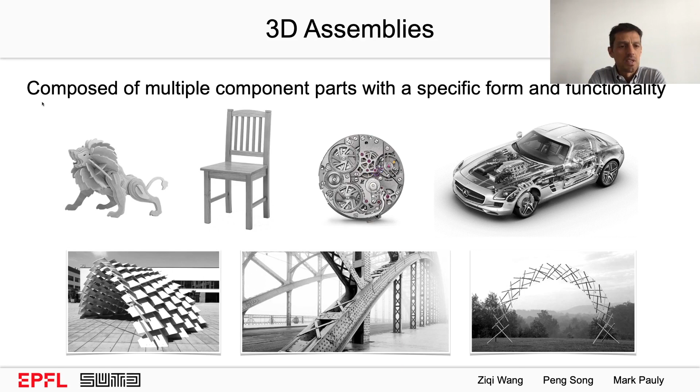So let me get started on the introduction. 3D assemblies are really ubiquitous in our life. Here you see examples of toys, furniture, a watch, a car, many structures and architecture. These assemblies are composed of multiple parts and have a very specific form and functionality.

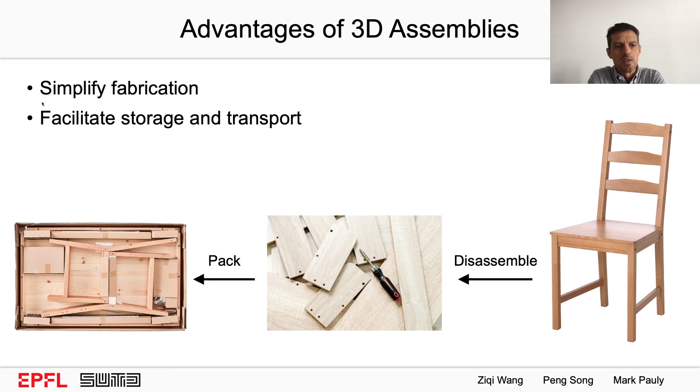First and foremost, fabrication. We can simply fabricate geometrically much simpler parts that can then be assembled into a compound object, which can have a much more complicated shape and also interesting functionalities. This allows us further to store and transport the component parts in a compact way. Finally, we can very easily maintain an assembled structure.

So in summary, the advantages of these type of 3D assemblies come from the fact that we can take simple forms and aggregate them into complex shapes. They can be disassembled and rearranged, for example, for storage and transport, and we can reassemble and reconfigure assemblies to adapt their form or functionality.

However, these advantages also come with various challenges for design. So let me quickly walk you through these design challenges.

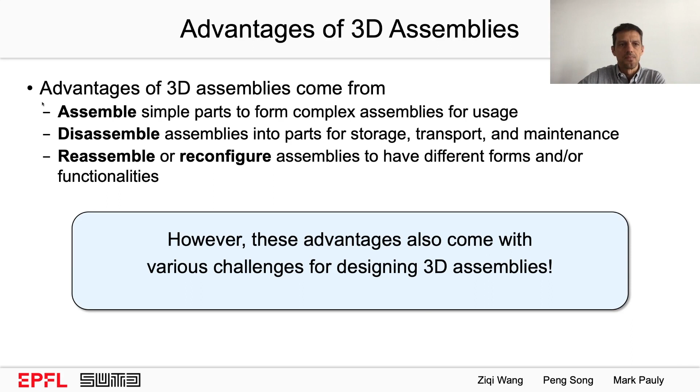First of all, we have to look at how we can adapt the component parts to a specific fabrication technology, as there will be constraints on the fabrication imposed by a specific machine. For example, if we use laser cutting, we're constrained to a specific type of 2D materials. CNC machining comes with its own constraint, and 3D printing as well.

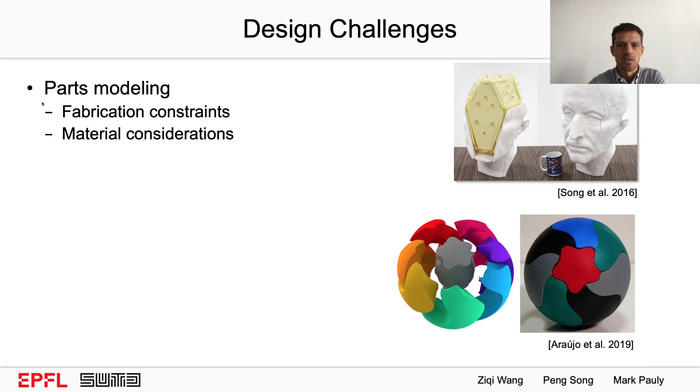Related to that, there will be constraints on material and appearance of the individual parts. We also need to figure out how we're actually going to join and aggregate component parts together. So what type of joining model are we using? How are joints interacting with the individual pieces in order to achieve the desired functionality?

We also need to look at the assembly process. In many instances, we care mostly about the final state of the assembly, but we will also have to find a way to put the pieces together such that we actually achieve the final desired assembly. If we care about storage and transport, we need to find ways to aggregate and pack the individual parts.

Very important, we want to, of course, during our design, create assemblies that are structurally stable. And we will look into this in great detail and see what that means specifically for the design process.

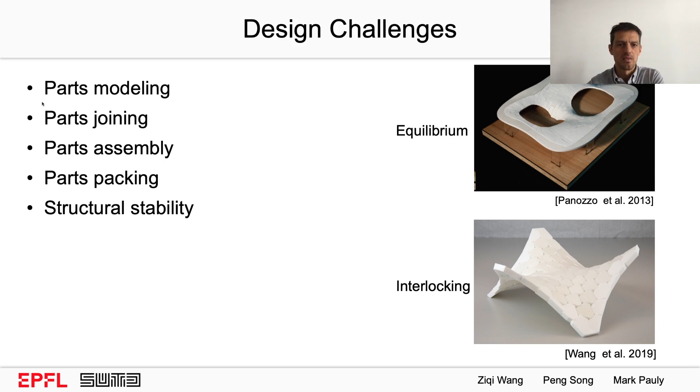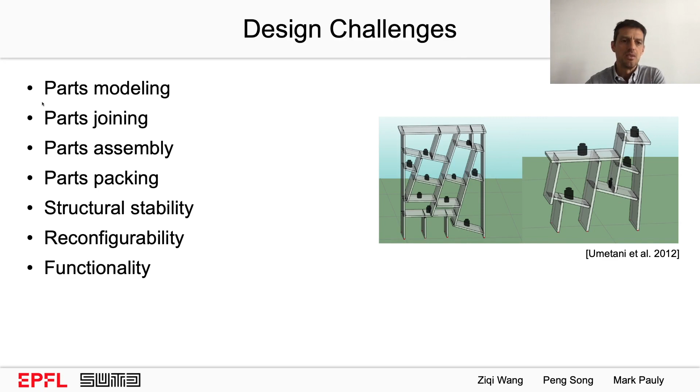In case of reconfigurability, like you see in these examples here, you add additional design challenges because the parts will not only be aggregated in a single way, but potentially in multiple ways, which then relates also closely to the function of the assembly. Finally, you might have functional requirements, for example, load-bearing capacity, that you need to take into account carefully within the design process.

So if we want to look at a global view of the computational process for designing assemblies, the general idea is to come up with an efficient and effective way to come from an initial idea about an assembly to a final physical model. And because there are many steps involved, including designing the parts, fabricating them, looking at their structural and functional performance, computation is really a key to make this process effective.

So these two aspects relate to the main part of this tutorial. In the second part after this introduction, we will look at tools to analyze computationally various assemblies. And then in part 3, Ziqi will talk about algorithms and data structures to design for assemblies.

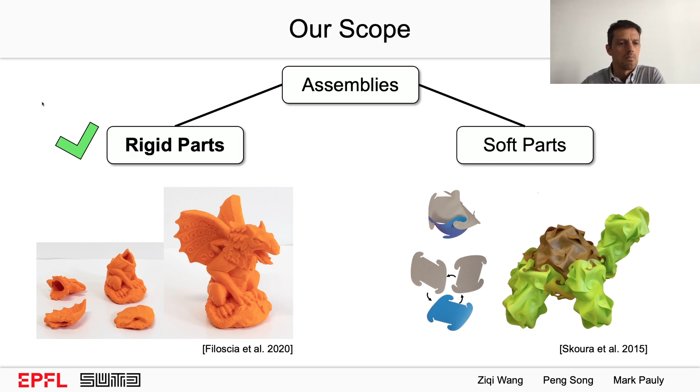To define the scope further, we will look at assemblies composed of rigid parts. We will not study assemblies where deformation of the parts plays an essential role in how they're connected, as you see here on the right. Our focus is on component parts that can be abstracted as rigid bodies, allowing us to focus on geometric methods and efficient optimization problems that abstract away many physical properties of soft parts.

Typical applications, as I mentioned earlier, include furniture pieces, architecture, puzzles, and so on. This distinction also has implications on the typical shape and function of parts, and changes the focus of design as well.

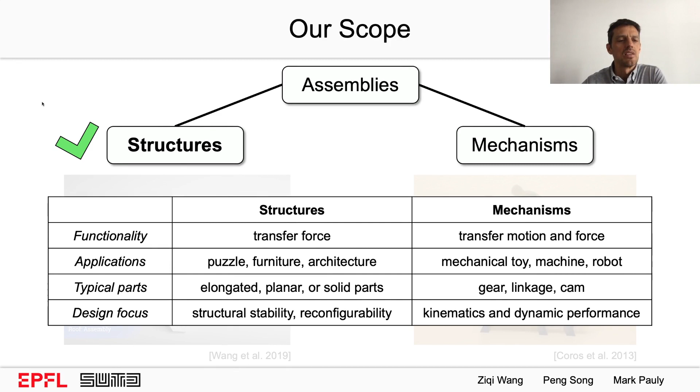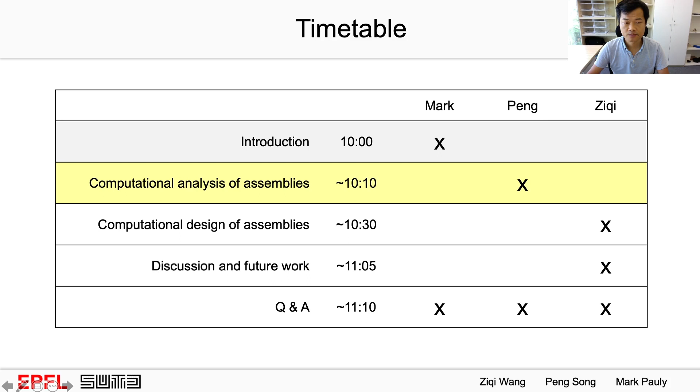And with this, I want to hand over to Peng, who will now look at computational methods for the analysis of assembly. This is Peng from SUTD. I'm going to present the second part, computational analysis of assemblies. This part will take around 20 minutes.

In this part, we introduce computational methods to analyze 4 different aspects of assemblies: parts joining, how to join parts together; assembly planning, how to assemble a set of parts into the final assembly; structural stability, what is the performance of the assembly under external forces; and packing efficiency, how to pack the parts as tight as possible.

Let's start with parts joining. It is common knowledge that parts in an assembly need to be joined together to make the parts stable. Compare these two house assemblies. The Lego house on the right is more stable than the wooden house on the left under external forces. But why?

It is because they use different parts joining methods. In the wooden house, parts are simply connected by planar contacts, while parts in the Lego house are connected by frictional joints. We call this geometry or material used to connect parts joints.

Joints can be broadly classified as permanent and non-permanent. Typical permanent joints include adhesive material such as glue and permanent mechanical fasteners such as riveting. Typical non-permanent joints include screws and woodworking joints. Compared with permanent joints, a significant advantage of non-permanent joints is to encourage parts disassembly and reassembly.

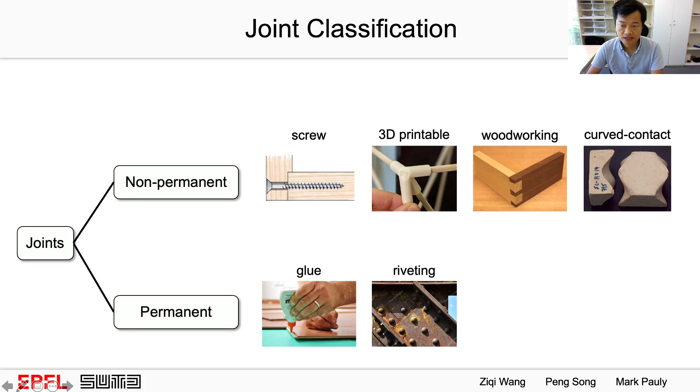Non-permanent joints can be further classified as external and integral. Screws and 3D printable connectors are external joints, and they are independent from the parts. Woodworking joints and curved contact joints are integral joints. Integral joints can significantly simplify the assembly process by assisting parts alignment and reducing the total number of assembly steps.

External joints can be further classified as conventional joints such as screws and customized joints such as 3D printable connectors. Integral joints can be further classified as woodworking, curved contact, and planar contact joints.

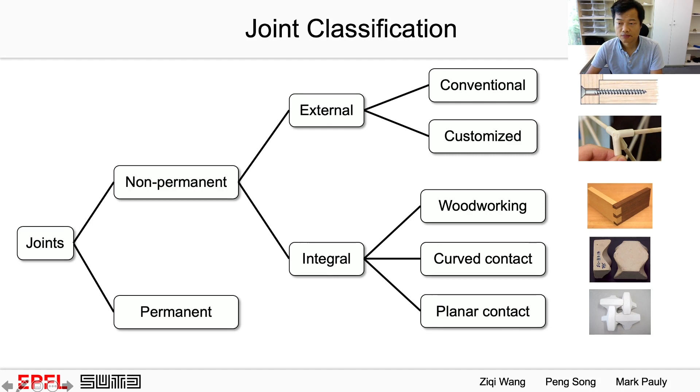Given joint geometry, we can also analyze its ability to connect two parts. Taking these four joints as an example, we can see that the joint's ability to connect parts becomes stronger from left to right. So how can we quantify the joint's ability to connect parts?

Given a joint, its ability to connect parts can be quantified by its ability to restrict a part's relative motion. In these four joints, if we consider only translational motion to take out the green part, all possible translational directions for each joint are visualized here.

For the planar contact, the green part can translate along any direction in a half circle, while for the tenon joint, the green part can only move upward. So based on this motion space, we can quantify the joint's ability to connect parts.

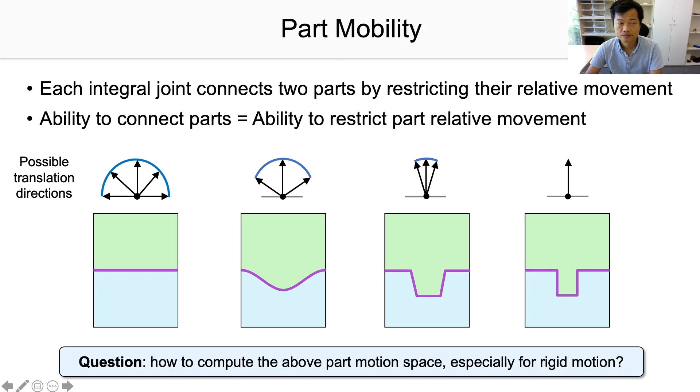Now the question is, how can we compute this motion space, especially when we consider rigid motion? To answer this, let's start with the simplest case, which is the planar contact. We assume the cyan part is fixed and calculate the rigid motion space of the green one.

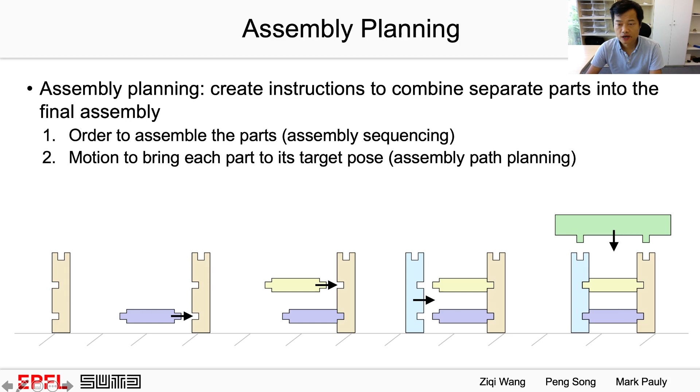Second, motion to bring each part to its target pose, also called assembly path planning. In this example, for the blue, yellow, and cyan parts, we simply translate them from left to right. And for the green part, we translate it downward.

This disassembly planning is a reverse process of assembly planning. A bijection exists between assembly and disassembly sequences and paths if we consider only geometric constraints. This enables an important strategy for assembly planning, called assembly by disassembly.

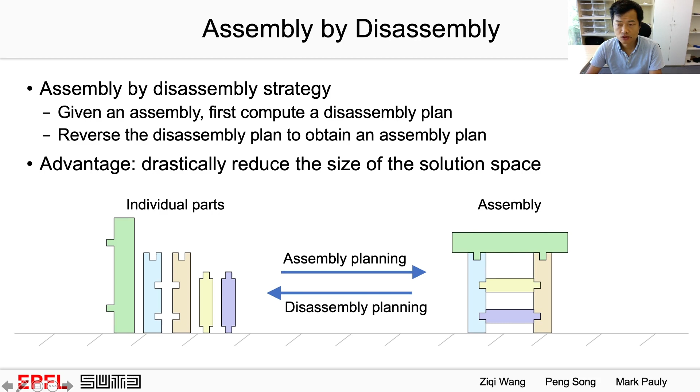The advantage of this strategy is to dramatically reduce the size of the solution space for searching valid assembly plans. This is because parts in an assembled state have far more precedence and motion constraints than the disassembled state.

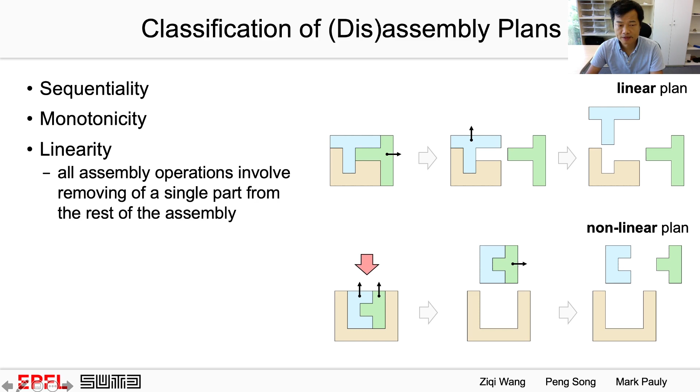Disassembly planning is an NP-complete problem. To simplify the problem, people focus on the simplest disassembly plans, which are sequential, monotone, and coherent.

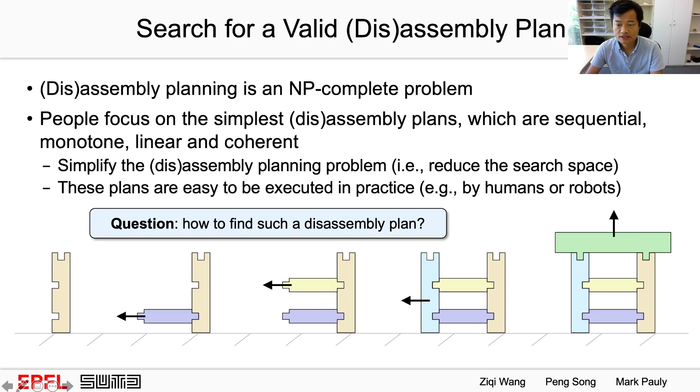Another reason to choose these disassembly plans is that they are easy to execute in practice, either by humans or robots. Now the question is, how can we find such a disassembly plan?

One common approach is based on the parts graph. We first compute mobility for parts in the assembly using the method introduced earlier, and to identify movable parts quickly, we usually select parts with fewer labels in the parts graph.

In this example, we identify and choose the green part. Next, we remove the green part from the assembly and update the parts graph accordingly. Then we repeat steps 1 and 2 for the remaining assembly.

For example, we identify and remove the cyan part, the yellow part, the blue part, until there is only one part left in the assembly.

One limitation of this parts graph-based method is that it supports only linear disassembly plans. Look at the computed disassembly plan here. In this plan, we take out each single part at a time.

Due to this limitation, this method cannot search a valid plan for this assembly, since there is no single part removable from the assembly. However, there is indeed a nonlinear disassembly plan.

In this plan, we translate the green and cyan parts together along the same direction to take them out. After that, the yellow part can be easily taken out.

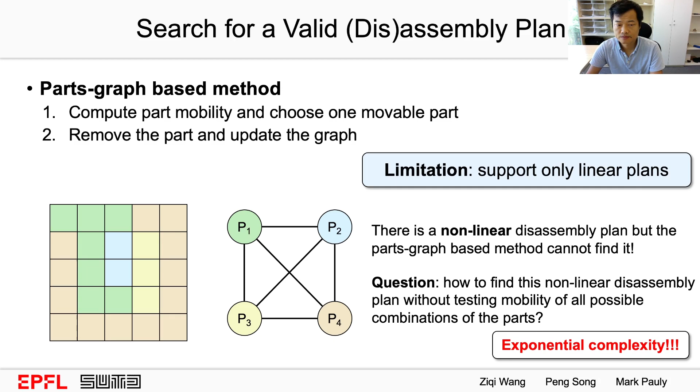One solution is to use the directional blocking graphs developed by Wilson in 1992. Given an assembly A and a blocking direction D, which is positive x here, nodes in the directional blocking graph represent parts in the assembly. And we create a directed edge from Pi to Pj if and only if Pj prevents any translational motion of Pi along D.

For example, here we create a directed edge from P1 to P2, since P2 prevents the motion of P1 along positive x.

We can prove that if the graph is strongly connected, no part or part group is movable along D. Thus, the graph on the left is strongly connected, hence there is no part or part group movable along positive x. A sub-assembly S of A is locally free to translate in direction D or minus D if and only if it is a strongly connected component.

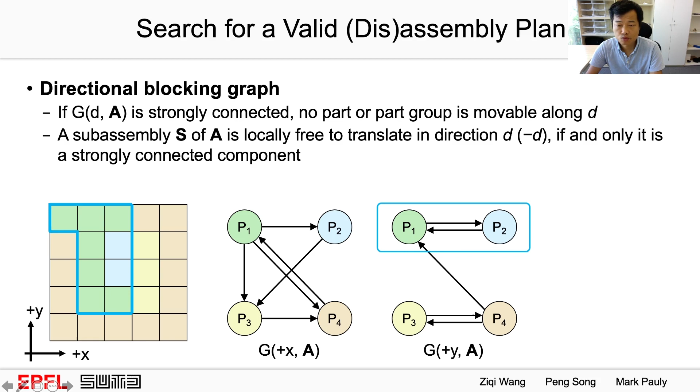Look at this sub-assembly. It is a strongly connected component and it can translate along positive y. Note that finding strongly connected components can be done in big O of n squared, where n is the number of parts.

Based on directional blocking graphs, we can find a nonlinear disassembly plan efficiently. First, we find one strongly connected component in the DBGs, for example P1, P2 in this graph. Next, we remove the sub-assembly and update the DBGs.

Then we repeat the first step and choose P3 in this graph, and remove the part P3 and update the DBGs. Since there is only one part left in the assembly, we are done with this disassembly plan search. By this, we find a nonlinear disassembly plan as shown here.

Now we will talk about structural stability. An assembly with rigid parts is structurally stable if it can preserve its form under external forces without collapse. Given these two assemblies, we know that the Lego house with friction joints should be more stable. But how can we quantify stability computationally?

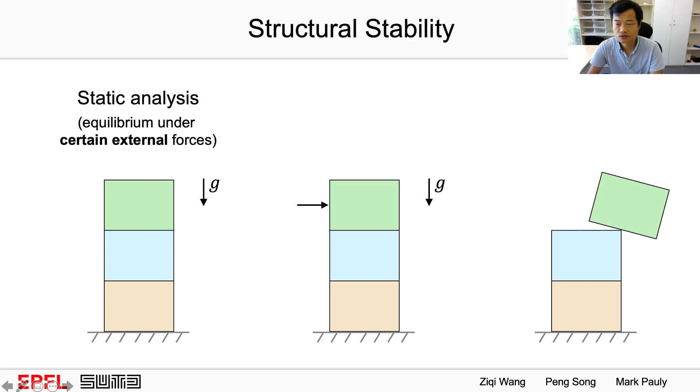A structurally stable assembly means it can be in equilibrium under certain external forces. Taking this assembly as an example, it is in equilibrium under gravity. However, a lateral force such as those from the wind can easily make it collapse.

In practice, an assembly should be in equilibrium not only under gravity but also under lateral forces. Tilt analysis is a process to quantify this lateral stability.

In an extreme state, an assembly can be in equilibrium under arbitrary external forces. We call this structural stability state interlocking.

Comparing these three states, we can see that the assembly becomes more and more structurally stable. But the cost is that the part geometry becomes more and more complex, since more restrictive joints are needed to connect the parts.

The state-of-the-art static analysis method is the rigid block equilibrium method. Given the geometry of a 3D assembly, a static equilibrium state means that there exists a network of interaction forces between the parts that can balance the external forces acting on each part.

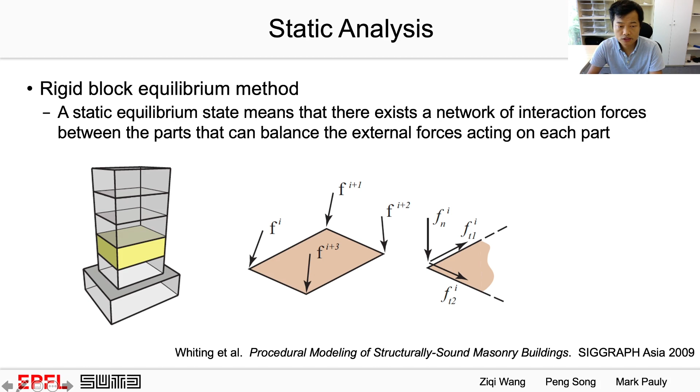Hence, the internal force on each contact plane is discretized as forces on the plane corners. Combined equilibrium constraints for each part give a linear system of equations as shown here. Besides this, we also need to formulate the compression and friction constraints. Please refer to the paper for details.

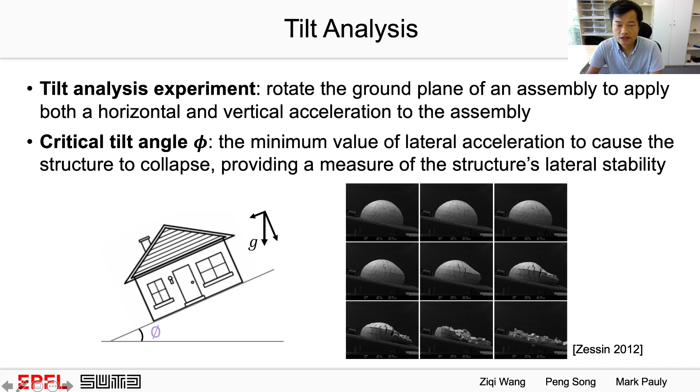Tilt analysis is the method to measure stability of masonry structures under lateral acceleration. In real experiments, the ground plane of a structure is rotated around a fixed axis to apply both horizontal and vertical acceleration to the structure based on gravity. The critical tilt angle phi is used as a measure of the structure's lateral stability.

Wang generalized this measure by considering all possible rotation axes to tilt the ground plane. This stability measure is defined as the minimum critical tilt angle among all possible tilt directions.

Interlocking test: we know that an assembly is interlocking if it is in equilibrium under arbitrary external forces. Here we define interlocking based on statics. However, trying all possible external forces is infeasible in practice. Based on the static-kinematic duality, we can define interlocking based on kinematics.

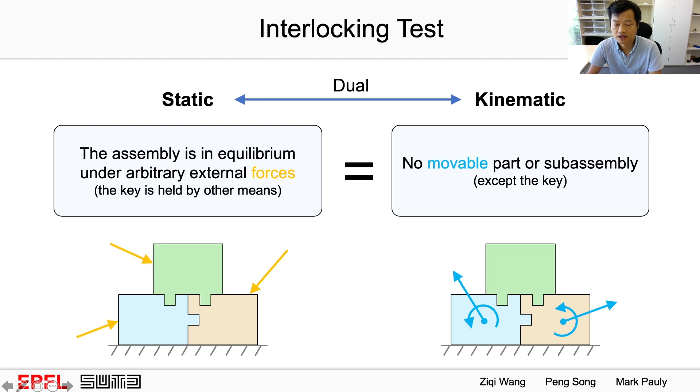An assembly is interlocking if there is no movable part or subassembly except the key. Recall that directional blocking graphs can be used to identify movable subassemblies efficiently. Hence, we can make a connection between interlocking assemblies and the directional blocking graphs. Based on this connection, we can test interlocking much more efficiently.

We show that if all these directed graphs are strongly connected except the key, the corresponding 3D assembly is global interlocking. Thus, we can test interlocking in the graph domain rather than in the geometry domain, with polynomial time complexity.

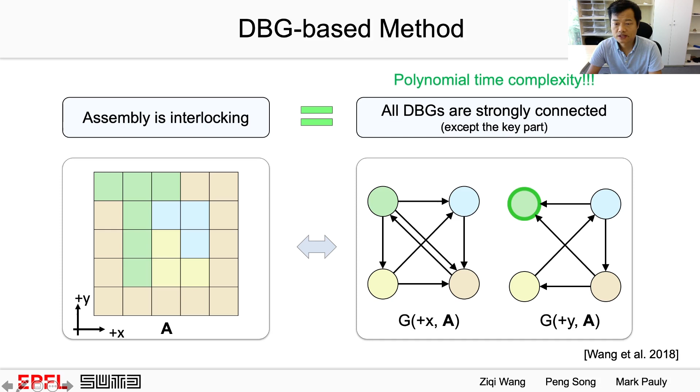The limitation of the DBG-based method is that DBGs do not consider non-sequential disassembly plans. Taking this as an example, this method considers it as interlocking. However, the green and cyan parts actually can be taken out by moving along different directions simultaneously.

To solve this issue, Wang proposed a more general method to test global interlocking based on solving a system of linear inequalities. Consider an assembly as a rigid body system where each part can move in 3D space. The constraint is to avoid collision among the parts. By stacking the non-penetration constraints for each contact in the assembly, we obtain a system of linear inequalities.

The assembly is global interlocking if the system does not have any non-zero solution. According to this method, this assembly is not interlocking since the system has a non-zero solution.

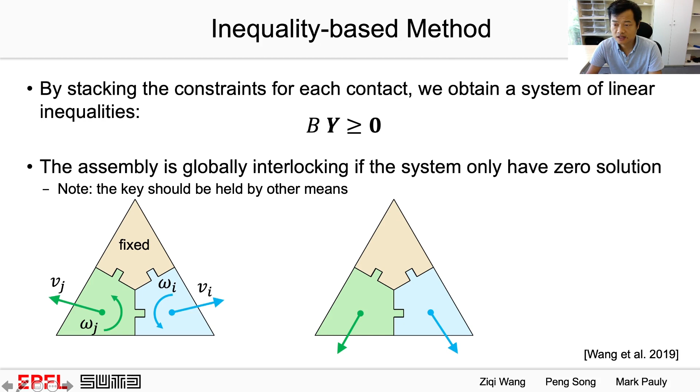Now let's talk about the last aspect of assemblies: packing efficiency. The goal of packing is to place as many objects as possible in a given container without overlapping. Extensive efforts have been devoted to packing irregular objects in 2D and 3D containers. The packing problem is known to be NP-hard.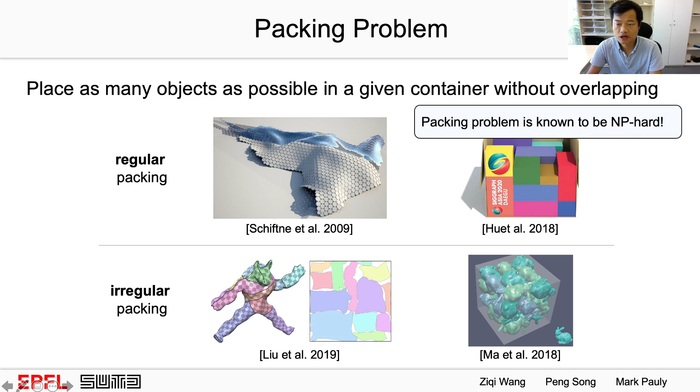The goal of assembly packing is to pack component parts of a given assembly within a container. Since parts usually have irregular shapes, assembly packing falls into the irregular packing problems. Assembly packing is useful not just in saving storage and transportation space, but also in improving manufacturing efficiency and minimizing waste of fabrication material.

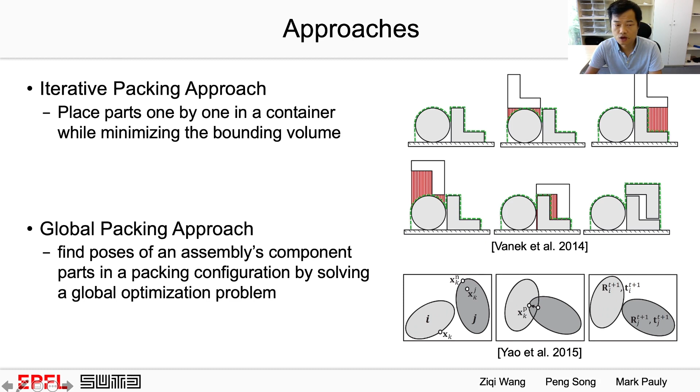There are two classes of approaches to solve the assembly packing problem: the iterative approach, which places the given set of parts one by one in the container while minimizing the bounding volume, and the global packing approach, which seeks to find assembly component parts in a packing configuration by solving a global optimization problem. Please refer to the papers for details.

Summary and discussion. In this part, we have introduced computational methods to analyze four aspects of assemblies, including part joining, assembly planning, structure stability, and packing efficiency. Future research efforts can be devoted to studying more aspects of assemblies for computational analysis, such as tolerance analysis and functionality analysis.

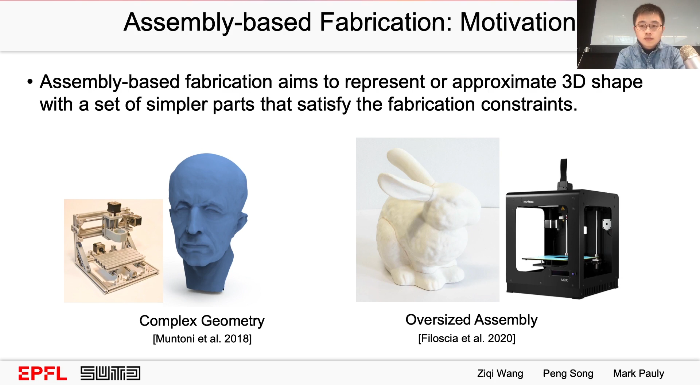My first research topic is about assembly-based fabrication. The major reason for making assemblies instead of a single piece is that every fabrication technique has its own restriction in terms of the fabricable shape. If the input shape is too complex or too large to be made, assembly-based fabrication can address these problems by approximating the input 3D shape with a set of simpler parts that satisfy the fabrication constraints.

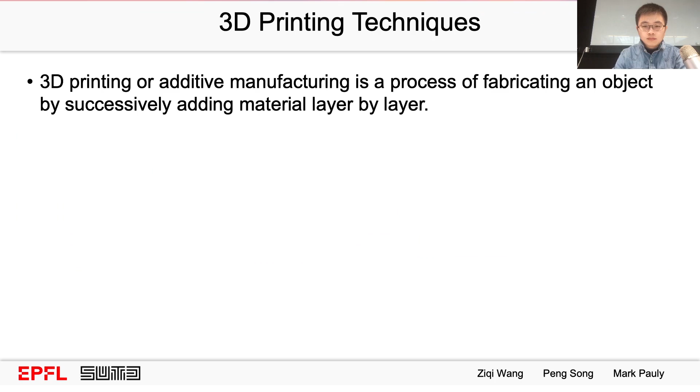Material deposition and layer solidification are two ways to implement 3D printing. Most domestic printers use material deposition due to its simple machinery. However, this machine requires printing support material for all overhanging areas. The layer solidification machine does not need support material, but at the cost of a higher price.

Most research works in graphics still focus on the material deposition machine due to its high accessibility. For assembly-based 3D printing, our goal is to design an assembly which has less support material, higher packing efficiency, and less appearance damage compared with printing in one piece. The core methodology is shape decomposition, which splits the input shape into printable parts with simple shapes and then assembles the parts to obtain the target assembly.

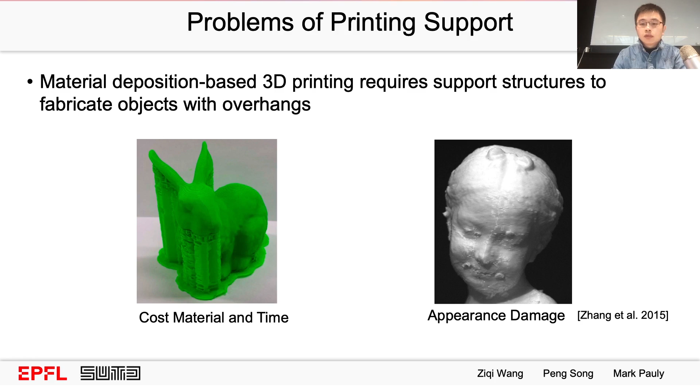Let's first see how to reduce support material by using shape decomposition. Support material, though it can be printed at a low filling rate, still slows down the printing process, causes excessive printing material, and damages the smoothness of the printed surface.

When the surface inclination angle alpha is smaller than a critical inclination angle alpha c, 3D printing material can be accumulated without extra support structures because of the strong adhesion between successive layers. In the extreme, when the inclination angle is 0 or below, we call the shape pyramidal, which is support-free for any 3D printer. Therefore, our goal is to decompose the input shape into support-free parts to save support material.

The top-down and bottom-up are two classes of approaches for the support-free decomposition problem. Top-down approaches try to find a set of 3D planes that clip the input shape into a set of parts, aiming to minimize the total support material. These 3D planes are organized as a binary space partitioning tree, or BSP tree, see left.

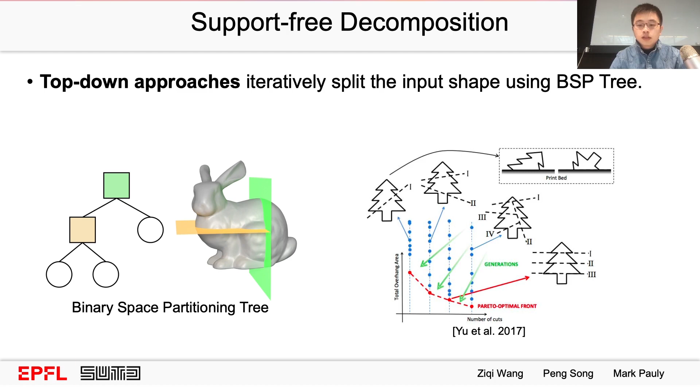Yu and colleagues proposed an evolutionary approach to search for these clipping planes, and their algorithm can save most of the support material, see right.

The second objective is about packing. Decomposing an oversized input design and packing its parts into a compact form saves storage space and reduces printing time and material cost. Sequential approaches and decompose-and-pack approaches are two ways to solve the shape decomposition for packing problem.

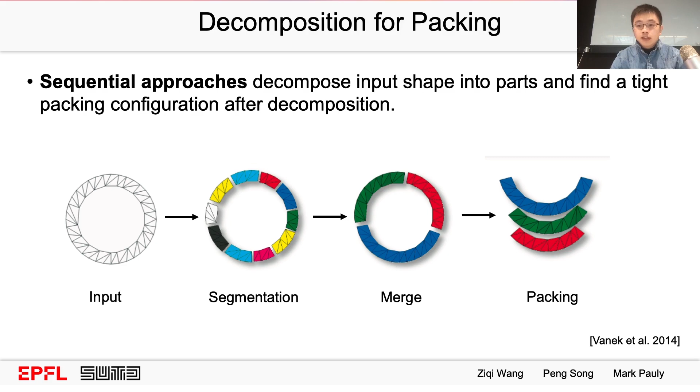Sequential approaches try to do shape decomposition followed by parts packing, while heuristics could be applied at the decomposition stage to encourage generating parts that are easy to pack. The decompose-and-pack approaches optimize shape decomposition and packing simultaneously.

Yao and colleagues take a set of pre-segmented parts as input. The framework represents each part as a level set function and optimizes the partitioning and packing to improve packing efficiency, as well as other metrics such as aesthetics.

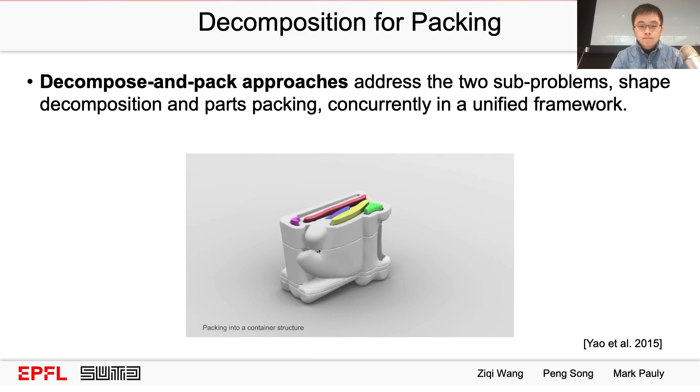The third objective is about appearance. The assembly's appearance is usually affected by at least 4 factors: cutting seams, removal of supports, staircase effect, and material color assignment. The support issue was already discussed in the previous slides, so I'll focus on the remaining 3 factors.

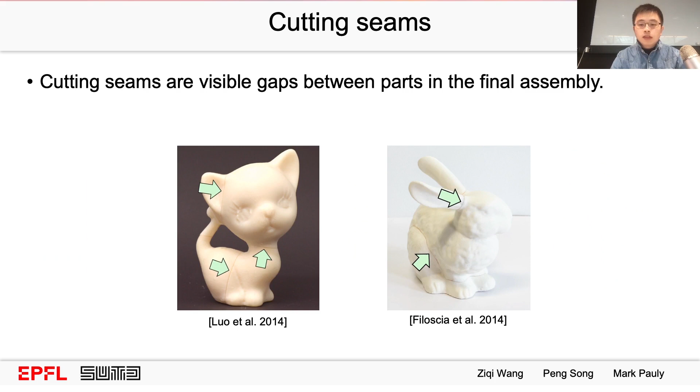The first appearance problem is cutting seams. Cutting seams are visible gaps between parts in the final assembly, which cannot be completely avoided due to manufacturing tolerances. To measure the severity of cutting seams, one approach is based on ambient occlusion, see left: the cutting seams should avoid high obtrusive areas. Another approach is to make cutting seams aligned with surface details by using non-planar cuts, see right.

Here ends the 3D printing section, and we move to the problem in CNC milling.

CNC milling is the process which subtracts material from a starting block. The machine is less constrained by the material and enjoys higher manufacturing precision compared with 3D printing. According to how many degrees of freedom the milling bit has, we have 3-axis, 5-axis, or even 5+ axis machines.

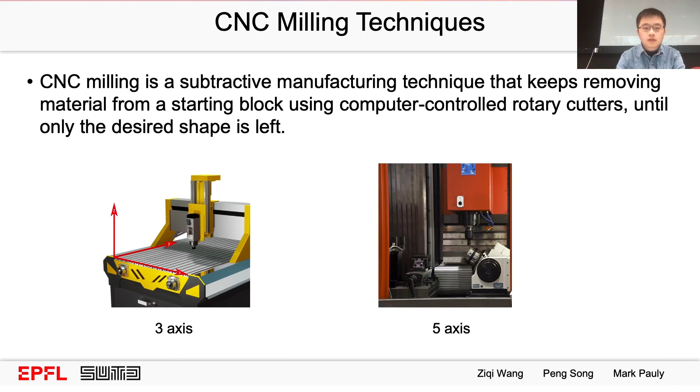3-axis CNC machine is the most affordable and user-friendly choice for home users. The problem for 3-axis CNC machine is that it only fabricates height-field surfaces. The surface height-field direction D has to match with the Z-axis of the CNC machine.

The main methodology for assembly-based CNC milling is height-field decomposition, which decomposes the input shape into height-field blocks. Local modification is needed for the parts whose outer surface has non-height-field areas.

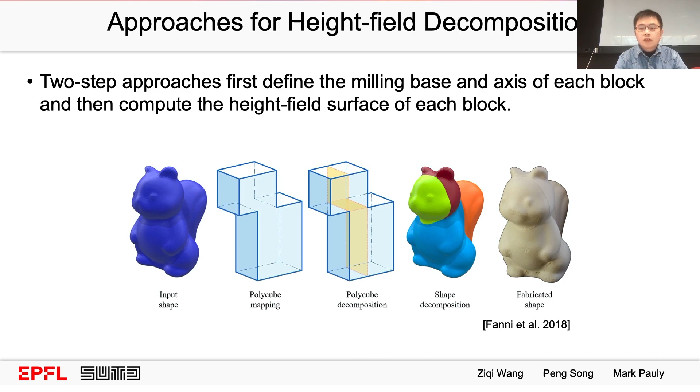There are two approaches for height-field shape decomposition: the two-step approaches and optimization approaches. Fanni and their colleagues apply the two-step approach to first compute the base and axis of each height-field block by using a polycube representation of the input shape, and then generate the geometry of blocks by performing a polycube decomposition on the shape. Muntoni and their colleagues apply optimization approaches.

Given an input model, they first produce a compact set of large, possibly overlapping height-field blocks that jointly cover the model surface by solving an optimization. Next, a minimum set cover algorithm is used to reduce the number of decomposed blocks while allowing overlaps among them. Lastly, the overlaps are resolved by assigning the overlap portion to one of the associated blocks using a graph-based algorithm.

Here ends the CNC milling. Let's move to the third part, the 2D laser cutting problems.

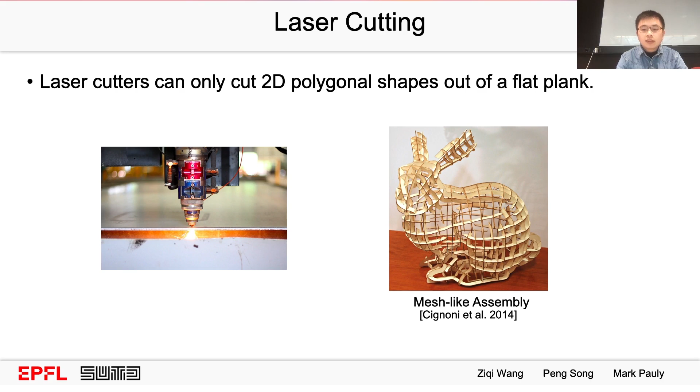Laser cutters can only cut 2D polygons. Despite this limitation, laser cutting has many advantages, such as high precision, high speed, and supporting a wide range of materials, making it widely used in industrial production and research prototyping.

To fabricate a 3D shape, assembly-based laser cutting aims to abstract or approximate the 3D shape with a set of 2D planar parts made by laser cutting. The problems can be classified into three classes: spatial assembly, mesh-like assembly, and shell assembly.

Joining 2D laser cut parts to form a steady assembly is a challenging task due to the limited contact area among the planar parts. The most effective way is to create integral joints on the laser cut parts, which not only stabilize the whole assembly but also simplify the assembly process.

Let's review the papers for the spatial assembly. Besides the shape abstractions, making furniture-like assemblies by using laser cut plates also gained much popularity among recent assembly works.

Then let's review the mesh-like assembly. Mesh-like assemblies are designed to abstract a free-form 3D surface with a set of ribbon-shaped slices.

Cignoni and their colleagues use long curved slices with prefabricated half joints, while Richter and their colleagues use short straight slices jointed with additional connectors.

We take the left paper as an example. Cignoni and their colleagues approximate a 3D surface with a set of curved slices that are placed driven by a smooth cross field defined on the surface. Half joints with enlarged sleeves are constructed on the slices to enable non-orthogonal connections among the slices in a structurally sound way.

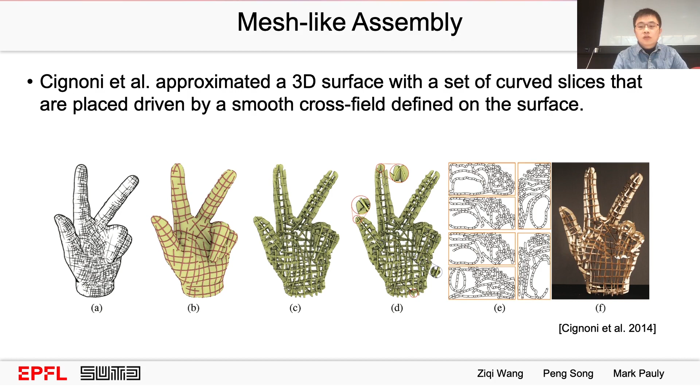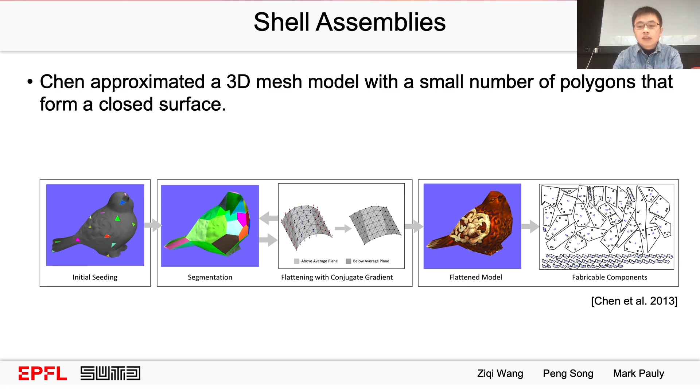Chen and their colleagues approximate a 3D mesh model with a small number of polygons that form a closed surface, by iteratively clustering mesh faces, estimating planes for each cluster, and slowly deforming the face towards each plane. Once the polygons are obtained, they are segmented to form planar parts.

Here comes the last part of our assembly-based fabrication, the mixed fabrication. A straightforward idea to avoid each machine's limitation is to decompose the input shape into several sets of parts and let different machines fabricate each set, utilizing their benefits.

Most of the recent works take a fast but shape-limited machine like laser cutting or prefabricated building blocks and combine it with a slow but less constrained machine like 3D printing to fabricate complex assemblies.

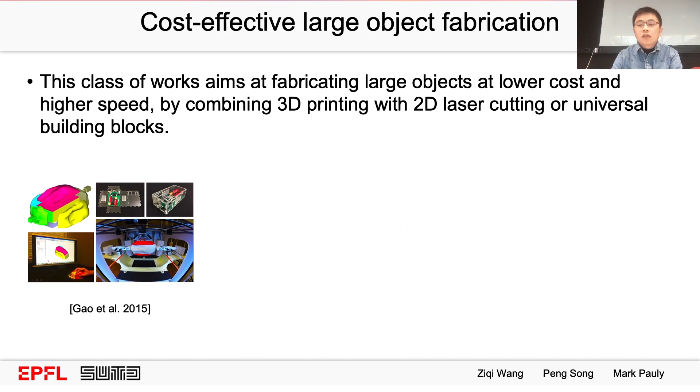The first application of mixed fabrication is to make large functional objects cost-effectively. These three projects try to fill the internal space of a 3D printed model with elements that are easy to make. In the left paper, Gao and their colleagues used laser-cut cuboids to make a customized mouse.

Another application for mixed fabrication is to make rod-joint structures. Tonelli and their colleagues designed a grid shell architectural structure by optimizing a polygonal tessellation on a given 3D surface to maximize static and aesthetic performance.

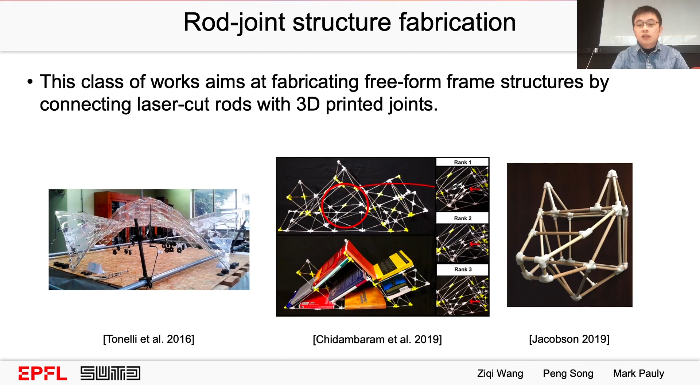Chidambaram and Jacobson both developed computational tools to design structurally sound rod-joint assemblies. The rationale is to delegate complex geometry to the joints fabricated by 3D printing, while the internal strength is retained by the rods that require only laser cuts.

There are more fabrication techniques that have not been discussed by our survey papers, like molding, hot wire cutting, wire bending, and customized fabrication tools. We also see huge potential to develop interesting assembly methods based on these new fabrication techniques.

Very few of the works in assembly-based fabrication consider structural stability of the resulting assembly, as they assume fabricated parts can be connected by a wide variety of joining methods, such as glue. So this part of my talk focuses on the computational method to design structurally stable assemblies, guided by a formal stability analysis described in our previous slides.

We classified the structural stability problem into two classes: the assembly in equilibrium and global interlockings. To encourage disassembly, all these methods choose to use integral joints or simply planar contacts for connecting the parts. Let's first look at the equilibrium method.

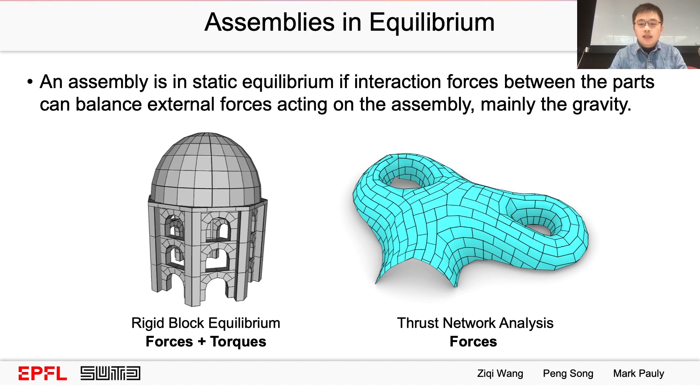For volumetric assemblies, most works use the rigid block equilibrium method, which checks both forces and torques balancing conditions. For surface assemblies like self-supporting structures, most works use thrust network analysis, which only examines force equilibrium within the surface. Whiting and colleagues integrated the rigid block equilibrium method with procedural modeling to design masonry structures that are in equilibrium under gravity.

The key is to compute the derivatives of infeasibility energy with respect to the design parameters. They minimize the infeasibility energy to find physically plausible assemblies by using gradient descent.

For self-supporting surfaces, the thrust network analysis developed by Block and colleagues is a well-known graphical approach. Here, G is the target compression shell and tau is the 2D projection. Tau star is the dual graph of tau. Suppose that the parts' gravity loads are evenly distributed on each edge of the graph tau.

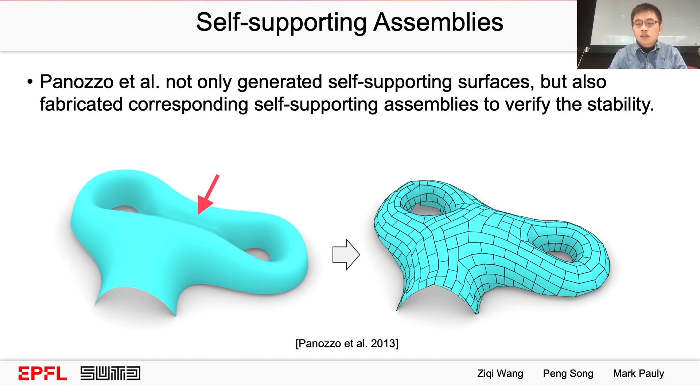A self-supporting surface is found by adding the dual graph tau star such that every polygon in that graph is closed. In addition to generating self-supporting surfaces, Panozzo and colleagues also optimized the surface tessellation to avoid the resulting blocks from sliding. Note that a local geometric feature in the target shape is deformed to make the surface self-supporting.

Let's move to the interlocking method. An assembly is interlocking if it can be in equilibrium under arbitrary external forces, when the key is held by other means. So interlocking assemblies have a stronger geometrical constraint than assemblies in equilibrium.

For voxelized input 3D shape, Song and colleagues proposed a shape decomposition algorithm to construct interlocking assemblies like the left bunny. Later, they extended their method to handle smooth, non-voxelized shapes for 3D printing, while the internal structure of their assembly are still voxels.

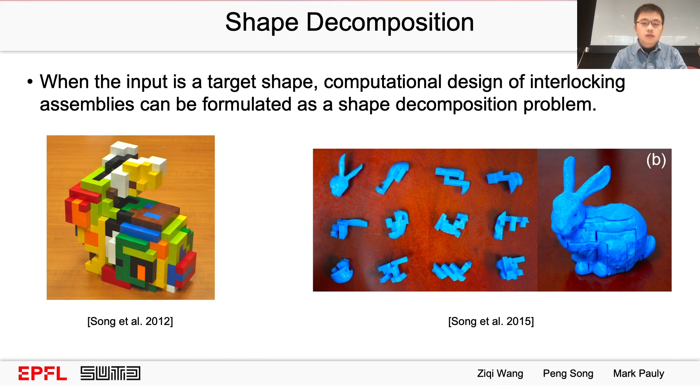When the input is not composed of voxels but a set of parts without joints, the previous shape decomposition method would not work. For furniture design, Fu and colleagues connected parts with orthogonal joints to make the assembly interlocking. Song later extended their method to design interlocking polyhedrons to fill the internal space of a large 3D printing model. Their polyhedrons are assemblies of 2D laser-cut plates connected with non-orthogonal joints.

Yao and colleagues instead used snap-fit joints to construct interlocking shell models to save material and printing time. The typical approach to address these joint planning problems is to construct local interlocking groups, LIGs, which are a subset of connected parts that are locked by a specific key in the group.

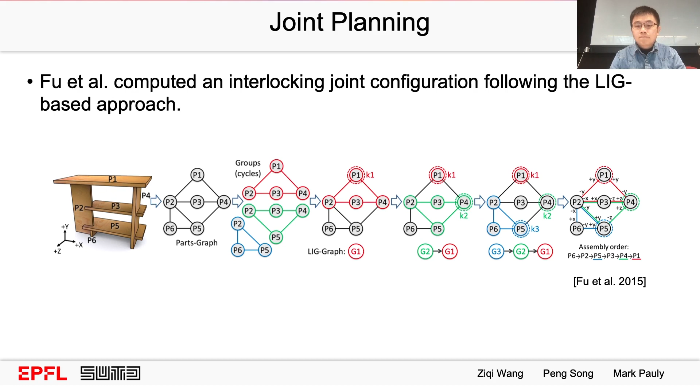Once multiple LIGs, as well as the blocking dependencies between them, are made, the resulting assemblies are guaranteed to be globally interlocking. However, the limitation of the LIG-based method is that the explored space is restricted to a small subset of all possible interlocking configurations. A much larger design space can be obtained by using the directional blocking graph.

Wang and colleagues represented part blocking relations with a family of base DBGs and leveraged efficient graph analysis tools to test and compute an interlocking arrangement of the parts. Their method provided a general framework for designing interlocking assemblies, which works both on the voxelized input and the joint planning problem.

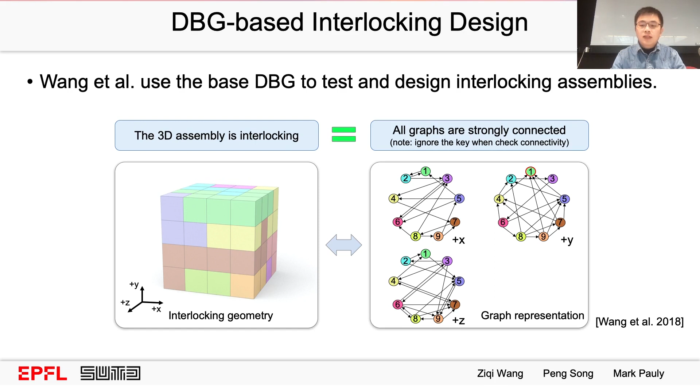In practice, equilibrium under gravity might be insufficient since the assembly could be exposed to different forces. Therefore, Wang and colleagues further optimized the assembly's geometry such that it can be in equilibrium for a cone of gravity forces. The third research topic is about reconfiguration.

Reconfigurable assemblies consist of a common set of parts that can be rearranged into multiple forms for use in different situations.

By reusing the component parts, reconfigurable assemblies have advantages like cost efficiency, multiple functionalities, and requiring less storage space.

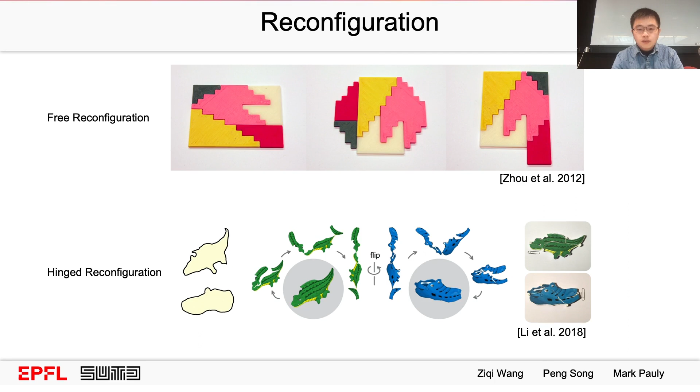We classify existing works on the design of reconfigurable assemblies into two classes: free reconfigurable assemblies and hinged reconfigurable assemblies, according to whether the component parts are separable or hinged during the reconfiguration process. Let's first review recent works in free reconfiguration.

For the free reconfiguration assembly, if the target shapes are provided, the problem can be formulated as geometric dissection. Otherwise, if the target shapes have been compatibly segmented, the problem is formulated as designing interchangeable parts.

There is a famous theory for the geometric dissection problem: as long as two 2D polygons have the same area, a dissection between them always exists. The proof does not restrict the number of parts, often leading to over-segmented parts that are physically implausible. The task of finding an exact K-piece dissection is proved to be NP-hard.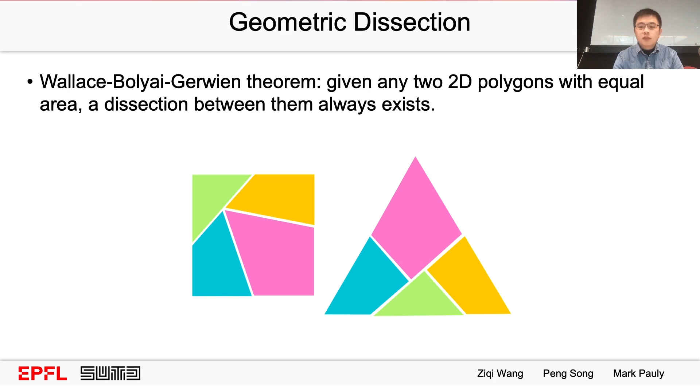Duncan and their colleagues relaxed the dissection problem by letting input shapes impose a soft rather than hard constraint on the dissection process, and developed a tree search algorithm to create a dissection result that approximates a given pair of 2D naturalistic shapes.

Another problem is to design interchangeable parts in free reconfiguration. Given a collection of compatibly segmented 3D shapes, Duncan and their colleagues partitioned them into parts and formed connecting boundaries of parts with similar semantic meaning, making these connecting boundaries identical while minimizing deviation from their original appearance.

Let's then move to the work in hinged reconfiguration. Designing hinged reconfigurable assemblies requires creating not just a common set of parts, but also hinges among them. We classify the hinged reconfigurable assemblies into three classes.

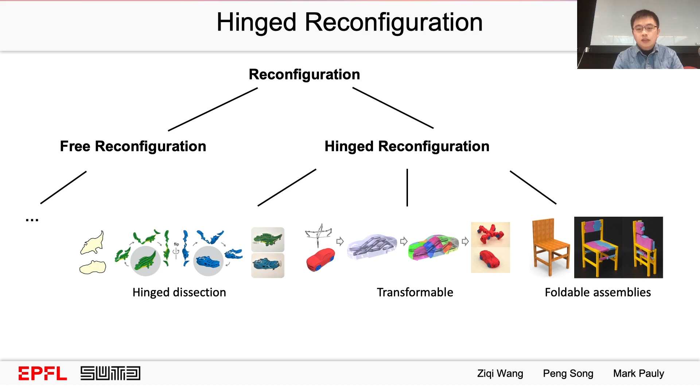First, a special geometric dissection called hinged dissection. Second, the transformables that can shift across different shapes. Third, the foldable assemblies for space saving.

Hinged dissection is a special class of geometric dissection that connects all the parts into a chain of hinged points and converts a shape to another by swinging the chain continuously. Zhou and their colleagues addressed the approximate 3D hinge dissection problem to design an object assembly that can be folded into a box. Li and their colleagues further designed hinge dissection between two 2D polygons.

Since reversible hinge dissection does not exist for every pair of input polygons, Li and their colleagues developed a quick filtering scheme to pick potential input shape pairs from a 2D shape collection. Their method can construct approximate dissection between two input shapes by finding a pair of conjugate trunks, which are a pair of polygons with the same edges yet in an inverse order in the two shapes respectively.

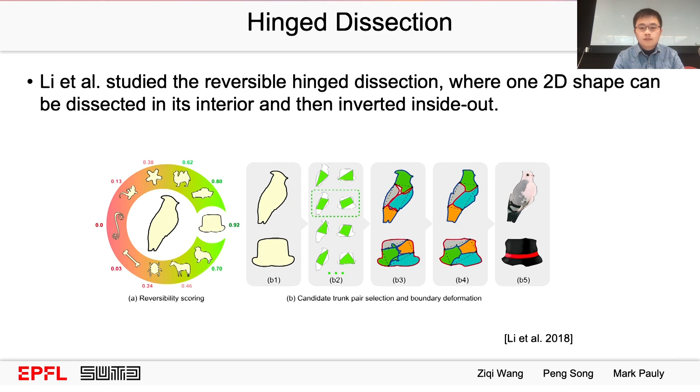The second class of hinge reconfiguration assembly is the transformables, which are physical characters whose overall shape can be changed merely by rotating or translating their component parts. Wang and their colleagues first designed transformables in a virtual setup, while Yuan and their colleagues made transformables that are physically fabricable using 3D printing.

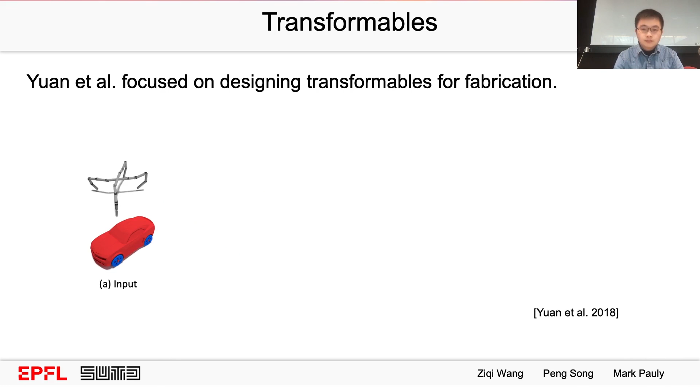The third problem in hinge reconfiguration is the foldable assemblies. Given an input 3D object with a folding direction, Li and their colleagues apply a minimum amount of modification to the object so that it can be folded to save space.

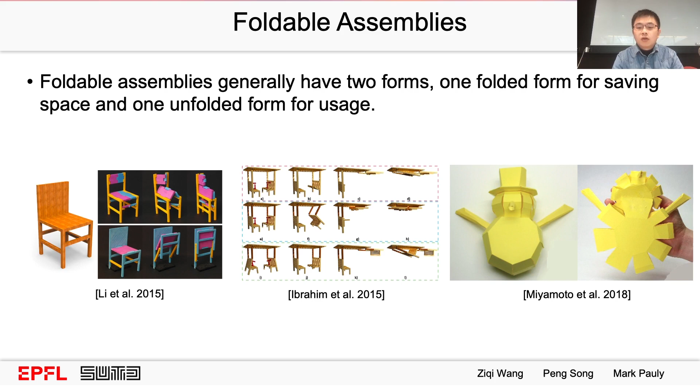Ibrahim and Yan addressed a similar problem, except that the folding direction is computed automatically rather than given. Rather than focusing on furniture, Miyamoto and their colleagues proposed a method for creating a flat foldable model with rigid panels that approximate an input 3D mesh.

The fourth research topic is about tileable blocks, which are a set of geometrically unique parts whose instances can build up complex assemblies. These blocks are universal and reusable in many constructions, bringing advantages like high utilization and low cost for mass production. The most well-known tileable blocks are Lego bricks.

Besides the typical problems of using Lego bricks to build assemblies, designing customized tileable blocks is also intriguing in engineering and architecture, and has recently attracted great interest in the graphics community. Let's first look at how to use Lego bricks to build interesting shapes.

The most critical factor here is to make the Lego assembly stable. Testuz and their colleagues represented a Lego assembly as a part graph. Assemblies whose part graph has more edges, while having fewer weak articulation points, enjoy better structural stability.

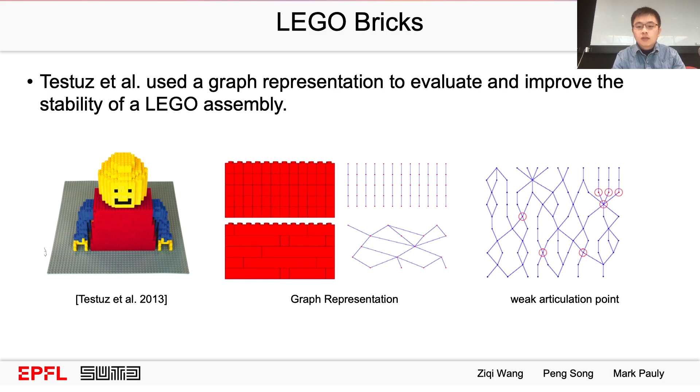They used a randomized greedy algorithm to search for a Lego layout by performing merging and splitting operations on the Lego bricks. Besides Testuz's work, Luo and their colleagues used force-based analysis to evaluate the stability of their Lego design. Yun and their colleagues provided a way to convert 2D pictures into stable 3D Lego assemblies.

Zhou and their colleagues fused more Lego bricks, such as sloping or circular bricks, into their design. Their method can identify visual features in the input 3D model and represent them with the best fitting blocks, for the customized tileable blocks.

Joseph Abeille discovered that identical tetrahedrons truncated at two opposite edges can be arranged to form a planar stable assembly known as Abeille flat vault. Besides tetrahedrons, cubes can also be used to create stable planar assemblies, which we name topological interlocking assemblies.

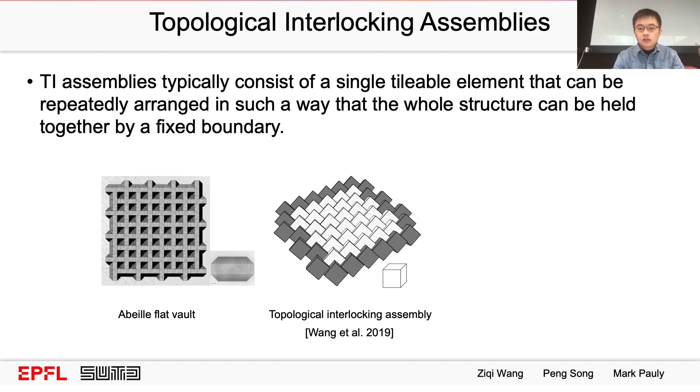The above-mentioned tileable blocks are designed for constructing planar assemblies. Although these 2D methods can be adapted to create 3D topological interlocking assemblies, these blocks will not have identical shape anymore, as their geometry has to be modified to follow the curvature of the surface.

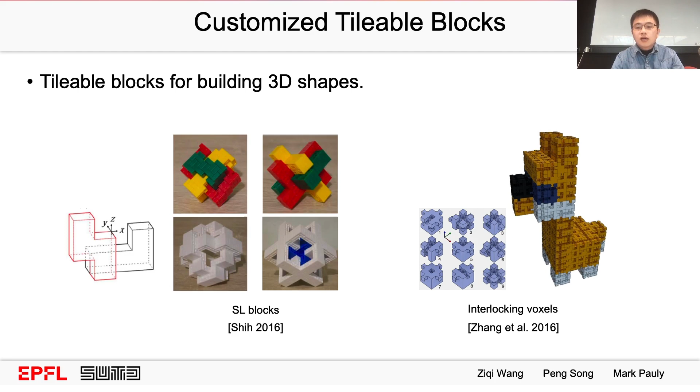This limitation motivates research to design tileable blocks for building 3D shapes, like the SL blocks on the left and the interlocking voxels on the right, which can approximate general 3D shapes.

Zhang and their colleagues designed a set of 9 tileable blocks with integral joints called interlocking voxels. By using a hierarchical, layer-by-layer assembly order, these blocks can build up voxelization-like assemblies that are globally interlocking.

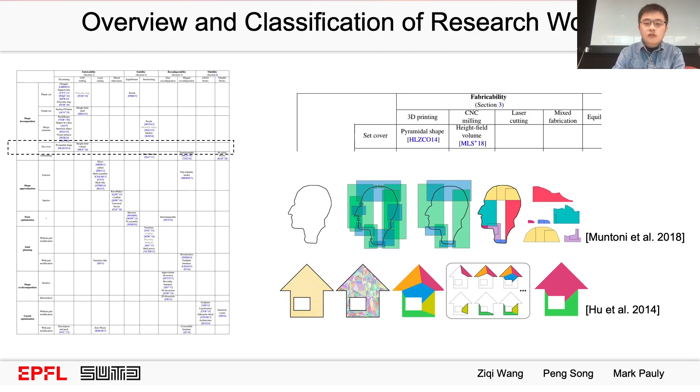This table also provides potential future works. For example, the equilibrium problem is solved by shape decomposition and parts optimization. Could we solve this problem by using joint planning and layout optimization instead?

Note that not every combination between design objectives and problem formulation will make sense. For example, designing a structurally stable assembly is not suitable to be formulated as a shape decomposition problem, since this assembly typically has a single geometric form.

So here are some future works. To simplify the computational design of assembly, a common assumption is that the fabrication material is rigid and the manufacturing precision is perfect. Yet in practice, materials are not infinitely rigid, and fabrication devices have limited manufacturing precision.

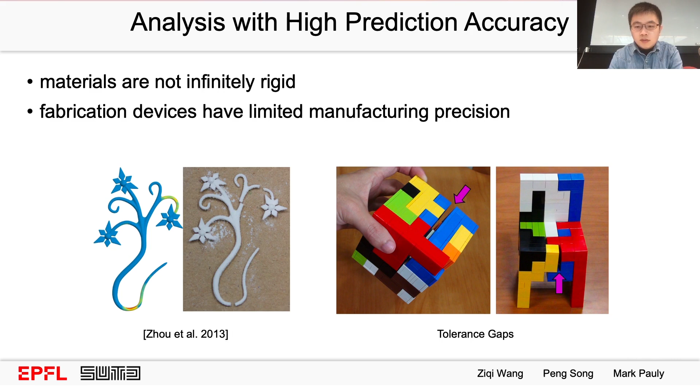As a consequence, structural issues can arise when the relative motion of two parts is restricted by a small contact or a thin joint. Internal stress concentrations at the contact or joint can lead to material failure. Similarly, a geometrically stable design could become unstable when fabricated, due to gaps among the parts caused by machining tolerances.

To improve prediction accuracy, one possible way is to take these imperfections into consideration in the analysis methods. Contact finite element analysis and tolerance analysis are two mature forward simulations widely used in mechanical engineering. Designing assemblies that are robust to these imperfections would be an interesting inverse problem.

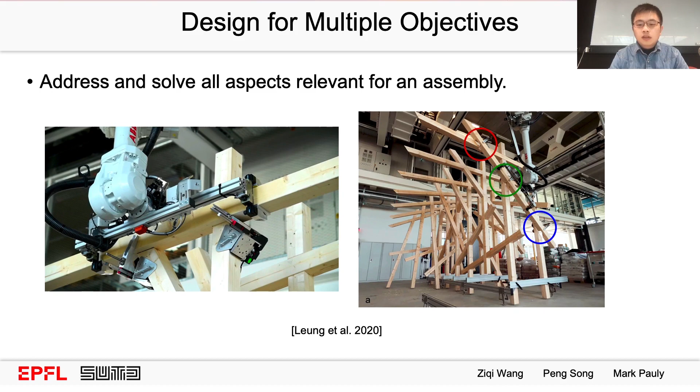We have discussed a number of objectives for designing assemblies. To date, however, most publications address and solve a specific objective and do not consider all aspects relevant to assembly. For example, for large-scale assemblies in architecture, combining the objectives of part fabricability, structural stability of the final and intermediate assemblies, and automated assembly process planning would provide a more complete framework for design.

Advanced design methods can be studied by exploring several aspects of assemblies in a novel way. First, existing design methods connect parts by using either integral joints that allow a single part removal direction, or planar contact that has limited capacity to restrict part motion. Studying joints in between these two extremes, as well as how they facilitate design assemblies, would be an interesting topic for future exploration.

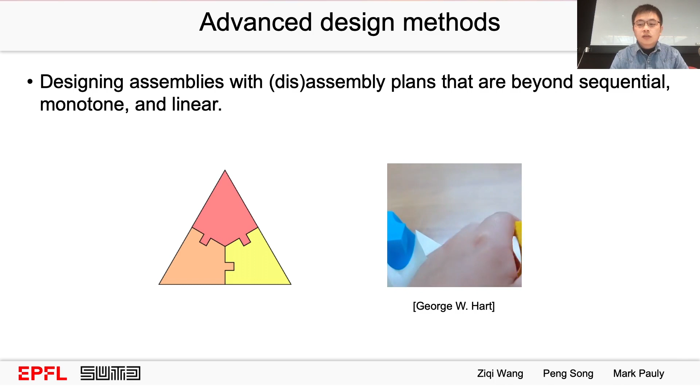The right cube can be disassembled by using both translational and rotational motions. Such assembly plans could be useful in terms of entertaining people or enhancing structural stability.

In recent years, tremendous research efforts have been devoted to solving traditional graphics problems such as shape synthesis and mesh segmentation using machine learning methods. However, for the assembly problem, there are fewer works using machine learning. But could we try some?

For example, finding the optimal assembling sequence for assemblies to reduce scaffolding is an interesting but very difficult task. Applying reinforcement learning, where we regard each assembly step as an action, to solve this difficult assembly planning problem could be a promising future work.

That leads to the end of our talk. Thank you for listening.